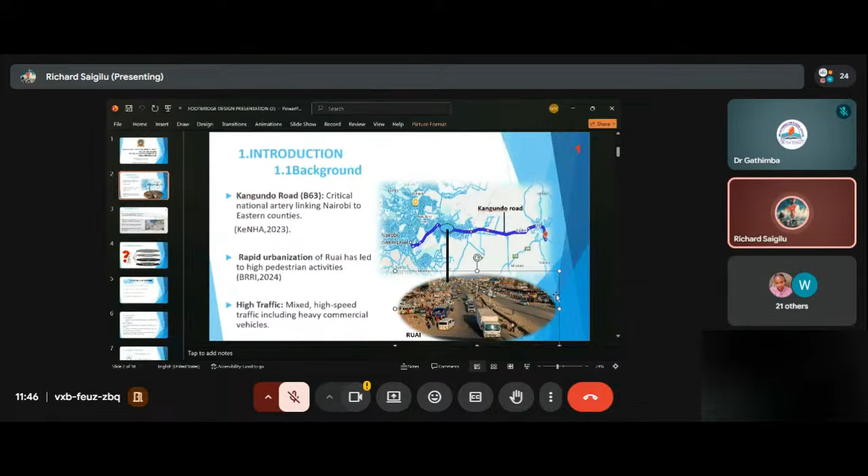Currently, there is a lack of crossing infrastructure, and our study proposes a grade-separated footbridge of 15 meters. In addition, the study explores the use of RCA as an alternative for natural aggregates. From previous studies, it has been shown that RCA can provide additional strength and durability when properly designed. Our study also considers a lattice structural design and examines the shear connection behavior of the RCA-based components, as supported by the literature mentioned.

Our problem statement. This slide outlines the key problems that motivated our study. First, the study area experiences frequent traffic accidents and in some cases fatalities. Secondly, there is increased environmental pollution resulting from vehicle emissions and demolition waste generated from construction activities. These negatively affect air quality and the surrounding environment.

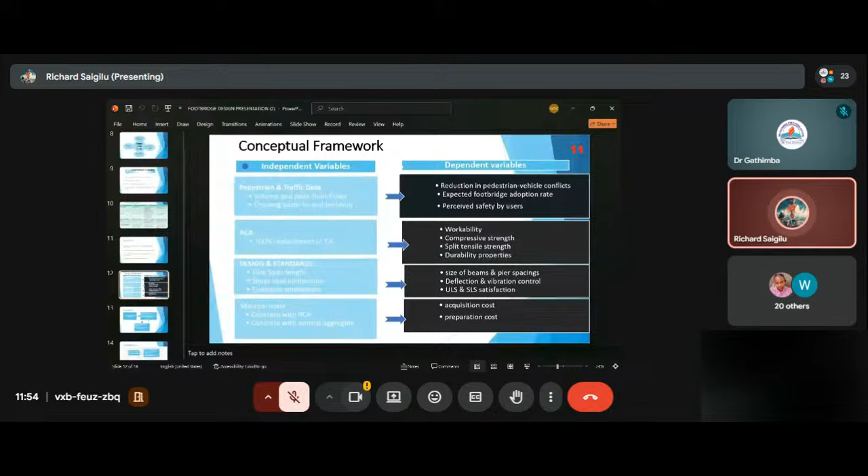In our methodology we will have two phases. The first phase will include site and data analysis. On site, we'll conduct a site reconnaissance, visiting the area to conduct pedestrian counts and observe crossing patterns. We'll also do pedestrian and traffic analysis, conducting traffic counts, speed, and composition.

Our next phase covers the second and third objectives: material and design analysis. For material suitability, we'll analyze the properties of RCA using secondary data, and assess its suitability against design requirements. We'll also do structural design, designing components such as the piers and footing, and produce the drawings. Finally, we'll do the cost-benefit analysis.

Here we'll try to compare the design which has incorporated RCA and the conventional design which has incorporated normal coarse aggregate. From there we have our project plan as listed.

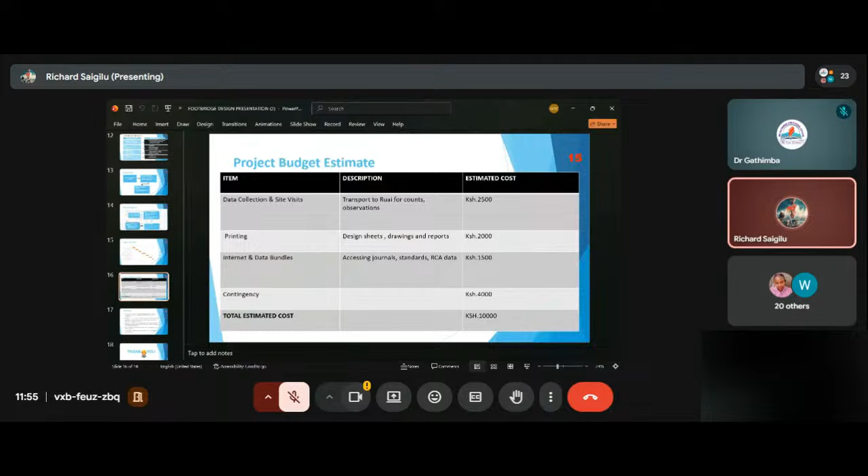Then we have our budget, which sums up to 10K. And we have our references, and finally our last slide. Thank you, and apologies for the...

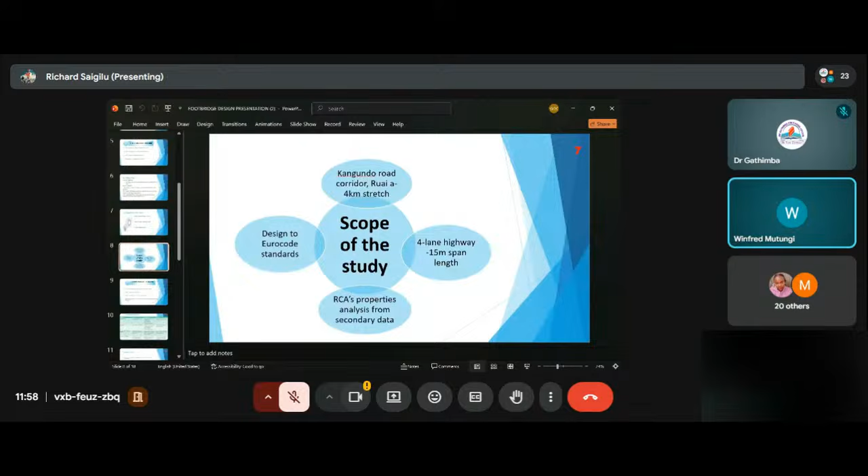Yes, you said you'll obtain secondary data for the RCA, you will not go to the lab. And on number two, you have limited traffic data collection. For the RCA, I will comment when I go to the literature review, the first one. The second one, on the limited traffic data—yes, of course you'll have limited time.

But I wanted to ask, this road is under which authority? Maybe they should have a lot of data on the traffic. KeRRA, KURA, KeNHA, I don't know—which authority is this road under? Under KeNHA. Don't they have data? Maybe you can check if you can get the data from them.

All right, so next, on the first one, on the secondary sources of data for the RCA, I hope you should have shown that in the literature review—what previous researchers have worked on RCA and what values they found. I wish you had shown that. You had shown that? Yes, you've captured it. If you have not shown, I believe you have that work in your proposal document.

But I have a question on the same. If this RCA comes from different sites—I believe you're getting it from, each RCA from a demolition site—are the properties from one site the same? Can you adopt the same in your design? Like if a building was demolished elsewhere, will the properties of the RCA be the same from two different sites? Just think about it as you adopt it in your...

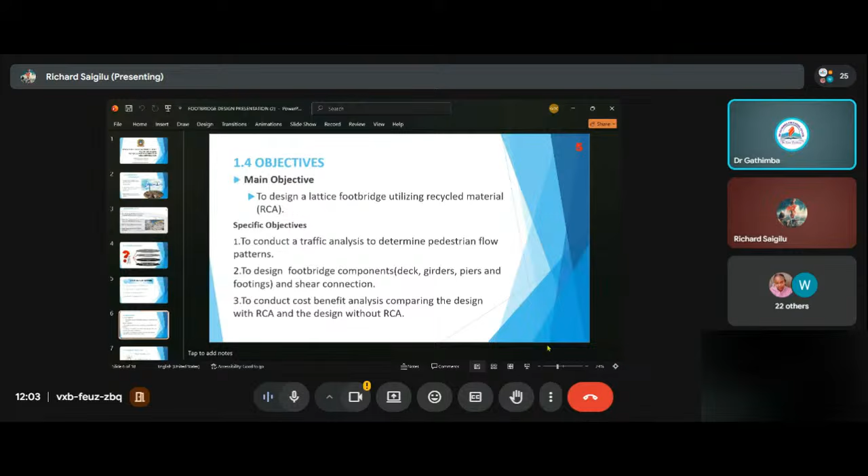Now, not that comment, your research hypothesis - you need to look at that. I think you might not have understood, from research methodology, what are hypotheses. These don't sound like hypotheses, this seems like research questions. And even if they were research questions, are they related to the objective? Because they should be directly related to the objectives.

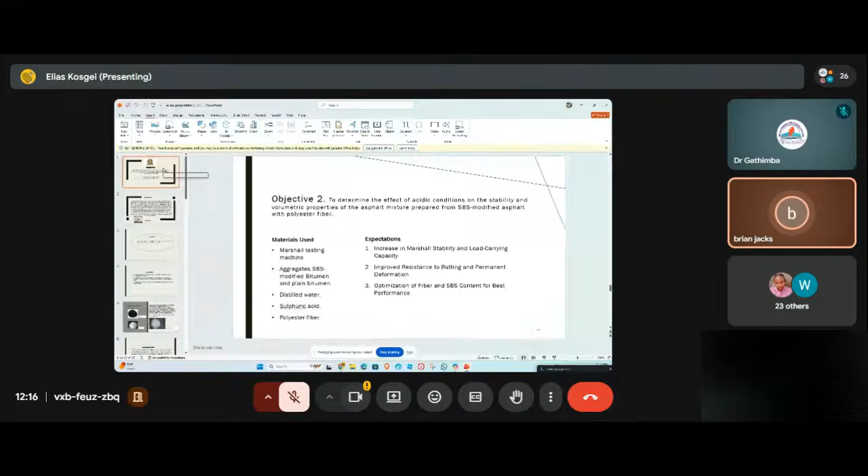Dr. Gathimba. Something for them? Thank you, Dr.

I was looking for that in the background. Your background. You mentioned about other materials that have been used before.

Noted, but in our main report, we're going to highlight that. Yeah, that's why it was a bit difficult even to get what problem and gap you are addressing.

Without that, it becomes a bit vague. You might just think you are doing work which is already existing, with no foundation or backing from past or previous studies. So that's a very crucial part.

Well, from the previous studies, they have only used the SBS polymer, not separately like us using it with the polyester fibers. So from previous background, they've only mentioned SBS alone, without including the polyester fiber. This is why our research is now unique in that way.

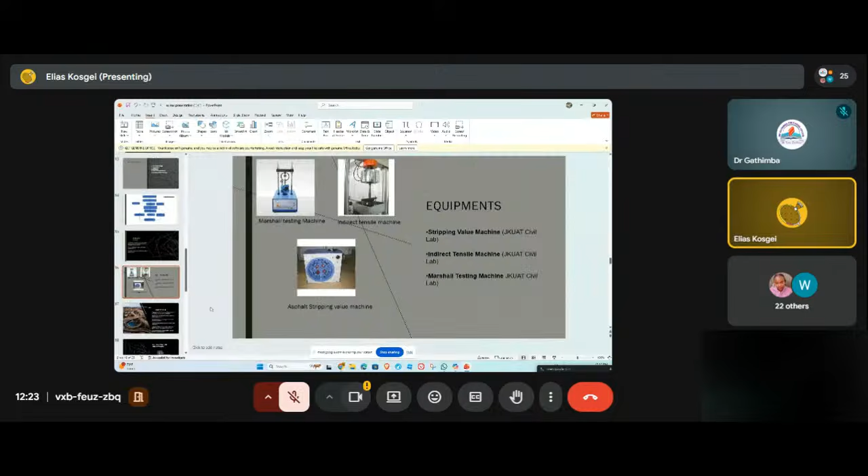Also, how we're going to the research methodology, and how we are going to plan it, and what the expectations from. So what did you change? So we added these expectations from. You added the expectations? Yeah, it wasn't there. We had only procedures - how to determine the stripping value and determine the effect of acidic conditions. So we added the expectations on what we expect at the end of this research.

Anyway, please, you should be consulting your supervisor. I'm sure you have not been seeing your supervisor. Now, general comment, your slides are very busy. Why? Until I had to stop the gentleman from reading. Under the introduction, they were very busy. Okay, go to the introduction.

Look at this, what is this? Elias, is this how we do slides? So we tried shortening the introduction part. But you mean with this one you left some things out? No, if we were to shorten the introduction part, we would have left some crucial and important information. So we tried as much as possible to.

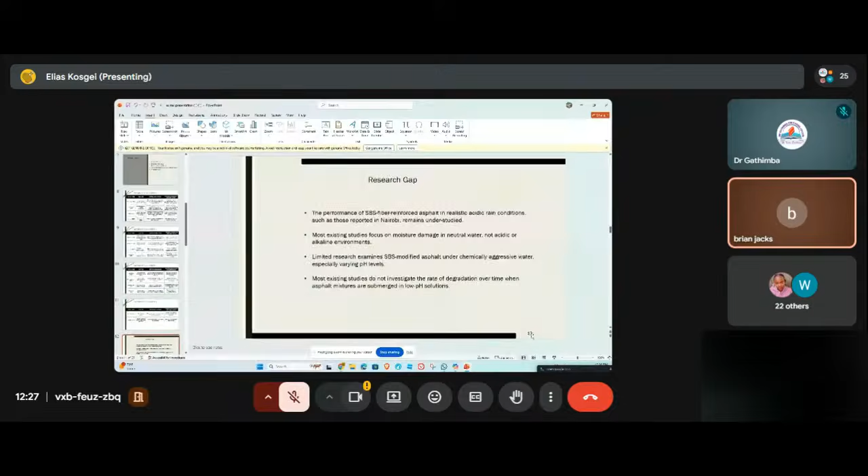Organization is poor. Again, your slides are not numbered. It is numbered here, can you see this? This is number 3. Which font is that? Font height, yeah, we'll expand it more next time. Your slides were not numbered. Some are not numbered, like number 15. They are all numbered, number 15. Let's go to slide number 15. And see they are not numbered. It is numbered actually, thank you.

Now look at this, what is this you're trying to show here? What are these lines? Slide number 15, what is this? What are these lines? This is part of the presentation, the PowerPoint slide, but the numbering of the pages is right here at the bottom. Why were you choosing this kind of presentation of the slide? What is the importance of those lines?

We'll have to improve it next time. Okay, well, there's no next time, Brian. Yes. Okay, please note that, yeah, thank you.

And your slides were not numbered, and I'm sure you need to see your supervisor more often. Okay, yes, noted, thank you, Dr. Winnie, I'm aware you are the supervisor. Maybe you may have something for them.

Okay, of course. First of all, thank you to the other panelists for the comments, and to the students. When the panelists give you comments, it's not a time to fight back. They are here to help you improve your work. So you should take these comments and use them to better improve your work. So as they commented, of course, I told you yesterday when you shared with me your slides, and I told you to improve them.

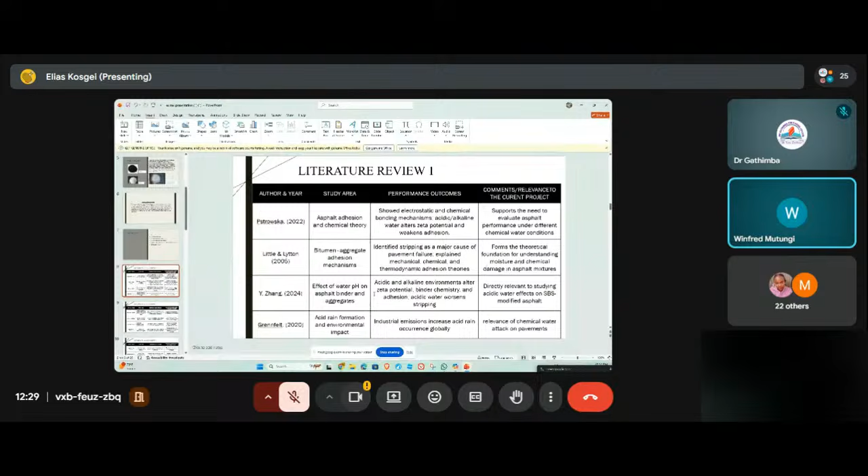Like you saw, you were here from the beginning, you saw what the other students were presenting. Their work would flow, there was flow, and they were able to be given comments. So please, if you make your work good, you give the panelists an easy time to give you guidance so that you can improve your work.

We are not here to fight with you. We are here to help you improve your work. So let's continue working together, and please, when you're trying to work on something, make sure you do that. Thank you. Thank you, Daktari. Thank you, Brian.

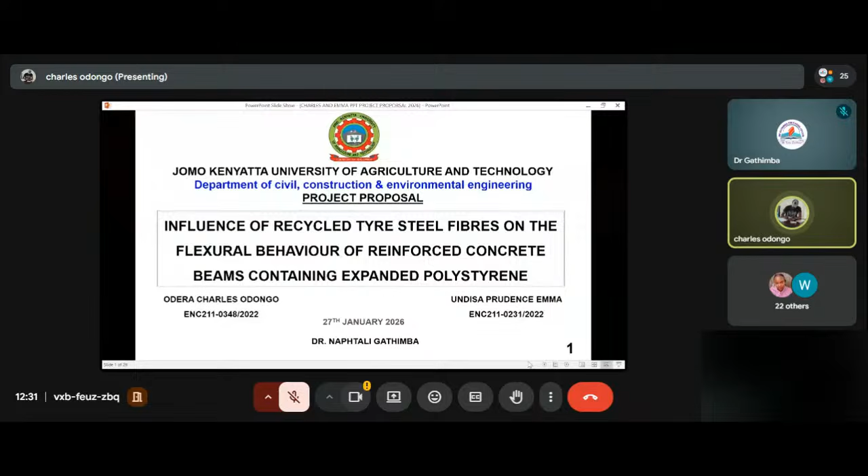On the background: due to increase in population, we need more infrastructure, which requires concrete to build, and aggregates are an important ingredient in concrete. Aggregates are extracted through quarrying, and heavy machines such as excavators use fossil fuels. So incorporating recycled materials, i.e. expanded polystyrene beads, to partially replace aggregates makes concrete production more sustainable, and in the long run it will reduce the dead load. It will also improve thermal insulation, and it will lower the cost of foundations.

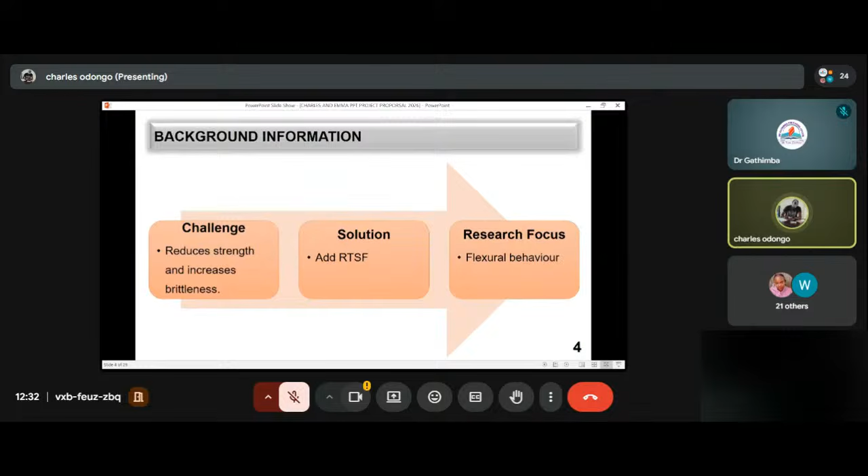EPS reduces compressive and tensile strength and increases brittleness of concrete. Steel fibers can help in enhancing tensile strength and also in crack control. We are now focusing on steel fibers from recycled tires, which will address EPS drawbacks on the reduced flexural strength behavior.

Moving to the problem statement: EPS usage has been studied in previous papers. EPS-based concrete is lightweight, but it reduces flexural strength, stiffness, and ductility, and this will limit its use in beams. Steel fibers from waste tires could enhance crack control, load capacity, and post-cracking behavior. So locally, there's limited evidence on the effectiveness in reinforced EPS beams. We lack data on how EPS inclusion and fiber dosage affects load deflection and cracks, and this gap hinders design guidance and adoption in our construction industry.

So why this study? Waste tires are an environmental nightmare. We reduce usage of virgin steel and carbon emission if we recycle them. They will counteract the strength loss to enable structural use of EPS concrete. So we are aiming for structural grade flexural strength of over 5 MPa.

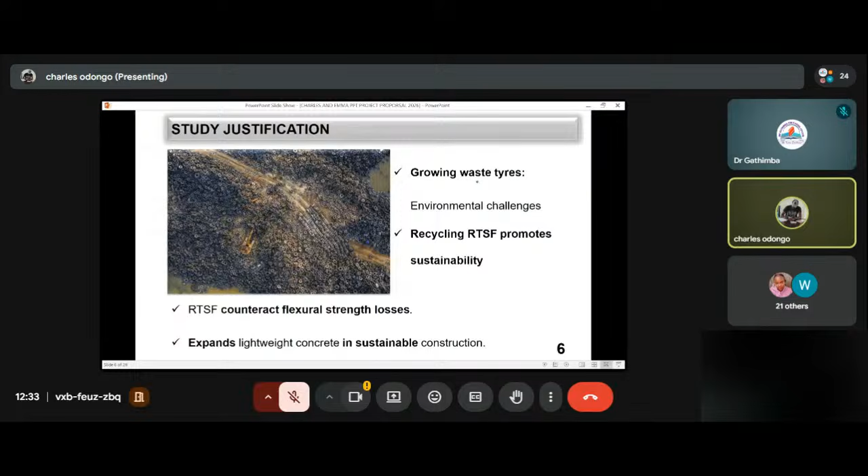Our aim is to investigate the influence of recycled tire steel fibers on the flexural behavior of reinforced concrete beams containing EPS. These are our specific objectives, which we'll discuss in the methodology.

The scope of work is experimental, focusing on recycled tire steel fibers being incorporated into EPS-based concrete. Dosage of EPS will be chosen from Salah Al-Din's work, and from this we will develop a mix design and prepare specimens for subsequent tests, such as slump test, cube test, and two-point load on beam, then data analysis, and then we'll draw conclusions.

For study limitations, field variability is not addressed because the research is lab-based. Our data analysis will be based on 28 days, so we won't focus on long-term properties such as durability. The RTSF will have irregular geometry and will be coated by contaminants. Aspects such as fire resistance will be excluded since we are focusing on flexural enhancement. High RTSF content could lead to clumping, but we will assume uniform fiber distribution.

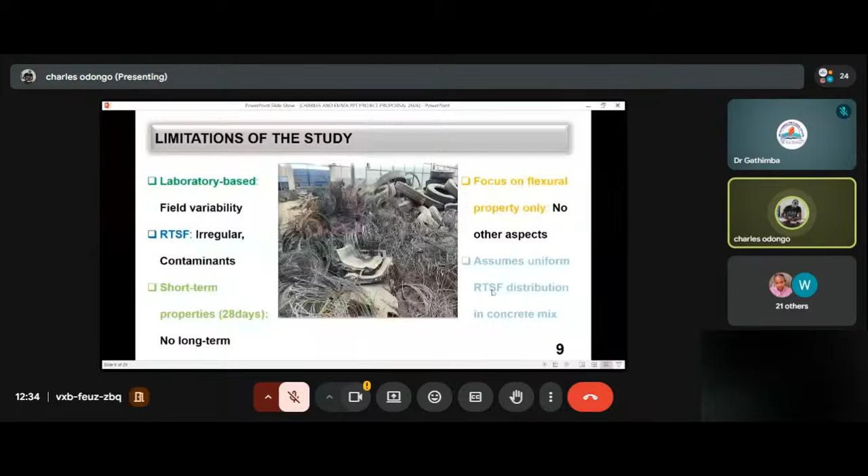On the literature review, we've looked at different research papers and picked Salah Al-Din. We are focusing on Salah Al-Din's work, so that's where we're going to get our secondary data. He was talking about the effects of adding EPS at different dosages: 20%, 40%, 60%, 80%, 100%, and the major drawback was a sharp drop in flexural strength at 40%. EPS will be constant, so he'll be our source of secondary data.

We also looked at other papers, and as you can see, most of our critiqued studies had gaps. For example, Rajeshwaran had EPS but no fibers, and this one also had EPS but no fibers. This one had no fibers but had EPS. This one had no EPS but had fibers. This one was just standard concrete without fibers or EPS. And this one incorporated new fibers, but not the recycled tire fibers that we're using.

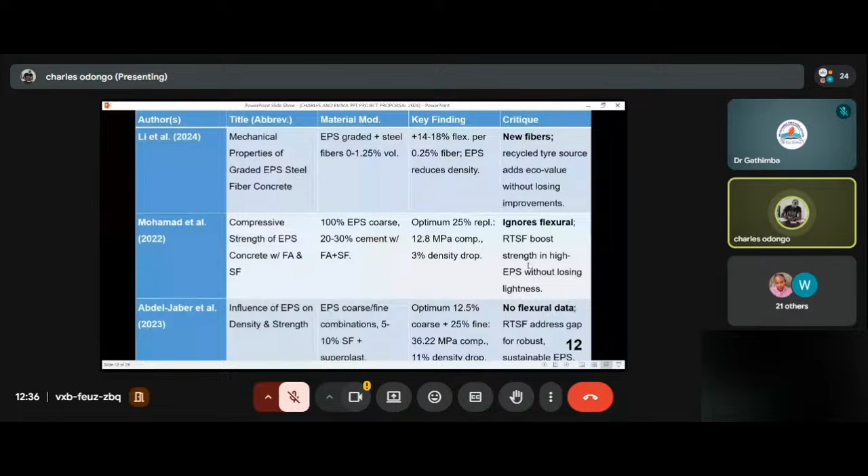As you can see, most of them ignored the loss in the flexural strength of EPS concrete. So our research gap, as you have seen, will be tackling the loss in strength and the increase in brittleness of EPS concrete. And of course, there's limited study on RTSF inclusion in EPS concrete.

Moving on, we came up with a conceptual framework where we have the independent variables and the dependent variables. We divided them into three sections. Under the materials section, we had cement, fine aggregates, EPS, and RTSF, which will affect the workability on the dependent side of the variables.

We had the things that will be varying, which are the RTSF, but for EPS it will be constant. This will affect the density, compressive strength, and the split tensile strength. On the third section is the specimen, whereby it will give us the values in dependent variables for the load deflection curves, ultimate load carrying capacity, crack patterns, etc.

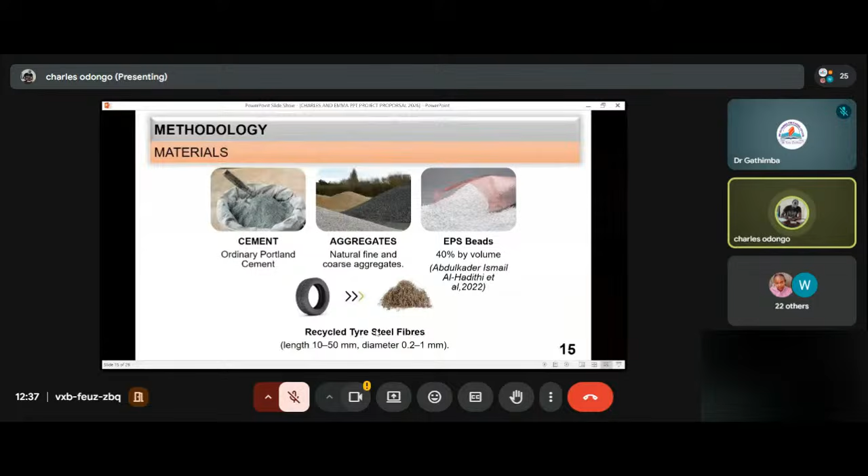Coming to the methodology, what materials will we be using? We have cement, aggregates, the EPS beads, and of course the RTSF, which is what we are bringing in. Our methodology is divided into three objectives.

Objective one is the characterization of the constituent materials. Objective two is the mix design and checking the workability and the mechanical properties. Objective three is about the beam, the fracture tests of the reinforced beam with the EPS and the RTSF.

On objective one, material characterization, we will do some tests on cement, on the aggregates and the RTSF. For instance, on the aggregates, we have to do the density, water absorption, PSD, which will give us the properties of these materials. Going to objective two, which is the mix design and fresh properties.

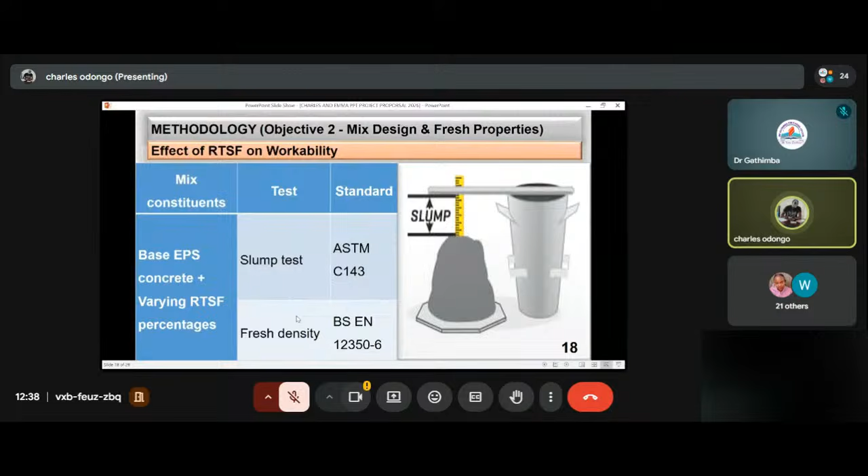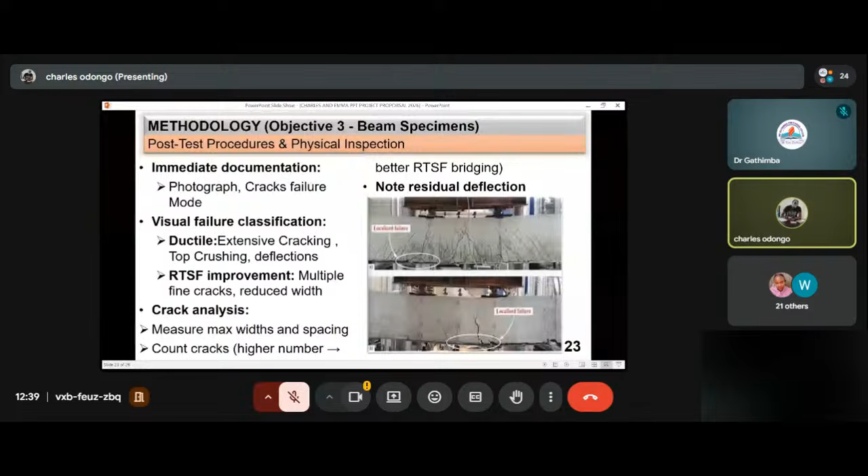So after doing the test, you take photographs so that you can assess the crack, the mode of failure, how it is happening, and measure the width and spacing of the cracks, which will add up to give us our data analysis.

From the data, we'll be able to plot a load-deflection graph, which will gauge the ductility and toughness of this RTSF concrete beam. The expected outcomes: by the end of the test, you'll be able to fully characterize the materials and know the effect of varying percentages of RTSF on the beam.

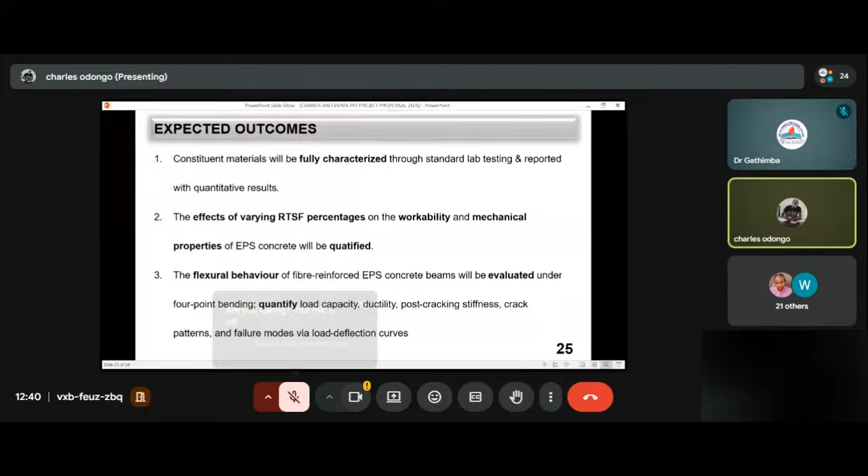Now, what were the previous comments on the last presentation or proposal, the concept? Dr. Mutungi raised issue with the specific objectives, that they were not clear.

Then Dr. Mutua told us to add visual diagrams for the beams, which is here, showing how we are going to do it.

Next, the other comment: you talked about our novelty. How have you addressed it? From whatever we've just shown you, everything is now clear. There is no storytelling or anything making things unclear for those we are presenting to.

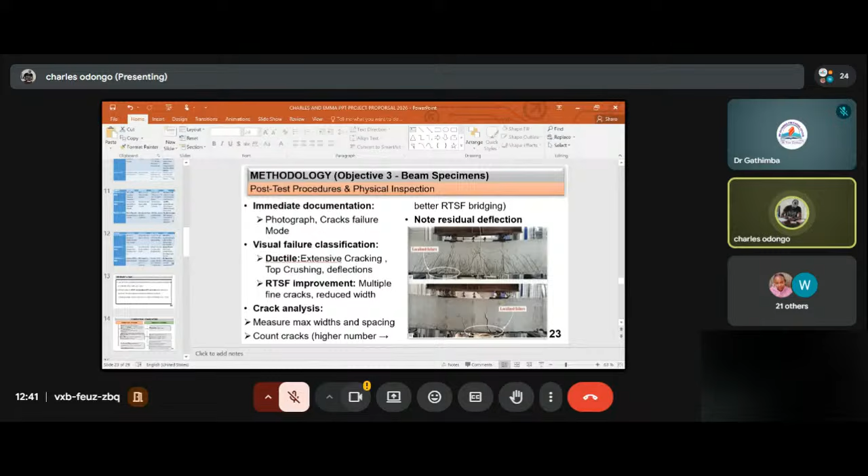So thank you. Dr. Winnie: thank you very much for the presentation. On the literature review...

I will tie this to the methodology. You said for the EPS, you will use a dosage which has already been formed by a prior study. Is that true? Yes, yes. Is one study enough to give you an amount to use in your research?

Did you find other studies, and what percentages did they give, similar percentages? Well, they had different percentages, but we picked Al-Hadithi because they had not used other admixtures or different things in their mixes.

So they were just trying to look at the EPS, how it affects concrete when incorporated to replace aggregates. So that's the only study you found using EPS alone?

Yeah, well, we have different authors, but we picked Abdulkader Ismail Al-Hadithi because we don't want our EPS percentage to change, we are not varying that one. I'm not confused that you found that study, I'm just asking.

I didn't see how much dosage, since you are adopting for the EPS. I also didn't see the percentages you suggested for the tire fibers. They will vary. Yes, those percentages, you need to indicate them to show us how much you'll be varying them. Okay, thank you.

Thank you. Uh-huh. Dr. Gathimba.

Okay. Yeah. Yes. Okay.

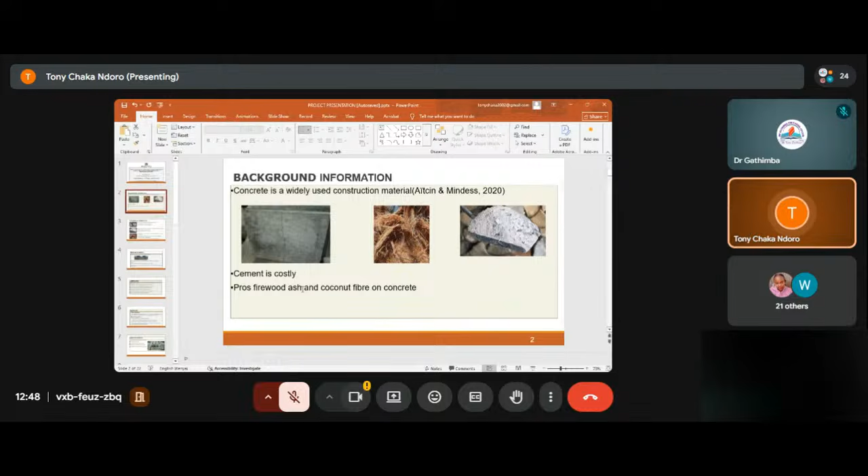Background information: early cement hydration produces calcium silicate hydrate and excess calcium hydroxide, while the firewood ash reacts pozzolanically with the calcium hydroxide to form calcium silicate hydrate and calcium aluminate hydrate, thereby improving strength and durability. But this reaction will not remove the calcium hydroxide completely — it will be left in little amounts, which will interact with the treated coconut fiber, leading to enhancement of fiber-matrix bonding at mid alkalinity, increased surface roughness, and also preserved fiber strength and crack bridging ability.

Problem statement: the concrete cracks under flexural loading, and the treated coconut fiber will deteriorate over time due to the excess calcium hydroxide. The firewood ash alone does not consume all the calcium hydroxide, and the separate use of the two will fail to balance the benefits of the long-term material performance of the concrete.

Justification: the high cost of cement, the availability of natural and biomass waste — in this case coconut fiber and firewood ash. The treated coconut fiber will degrade due to excess calcium hydroxide. The firewood ash does not remove all the calcium hydroxide, and combining the two will help control the calcium hydroxide level.

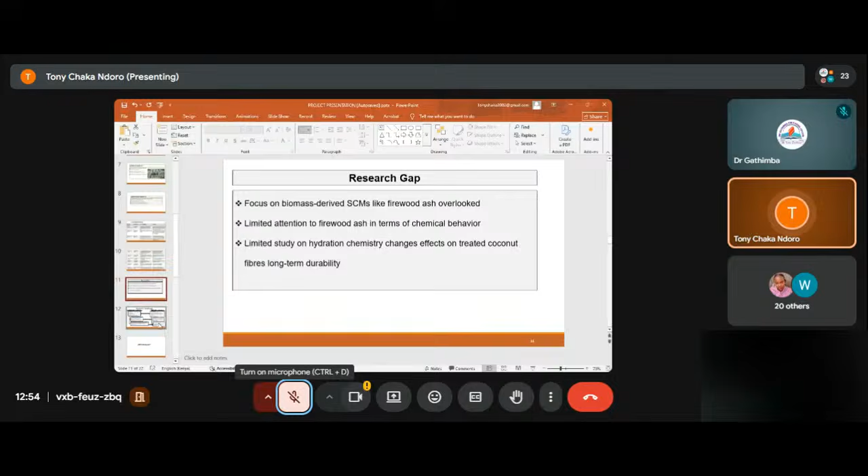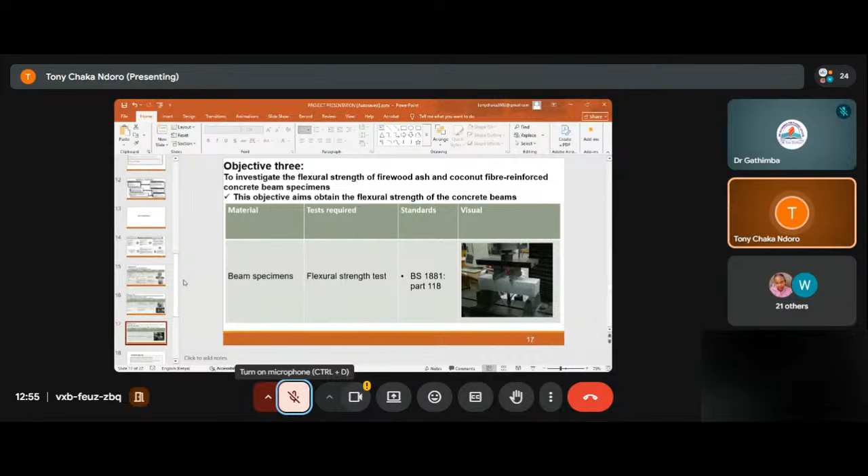These are the objectives: fine aggregates and coarse sieve analysis, firewood ash and treated coconut fineness for the firewood ash, the ones that will pass through the 75 micrometer sieve, coconut fibers, water absorption tests for workability, cement consistency and setting time, concrete slump test and concrete mix design for the cubes (compressive strength), and for the cylinders, the split tensile test, beam specimen, flexural strength test.

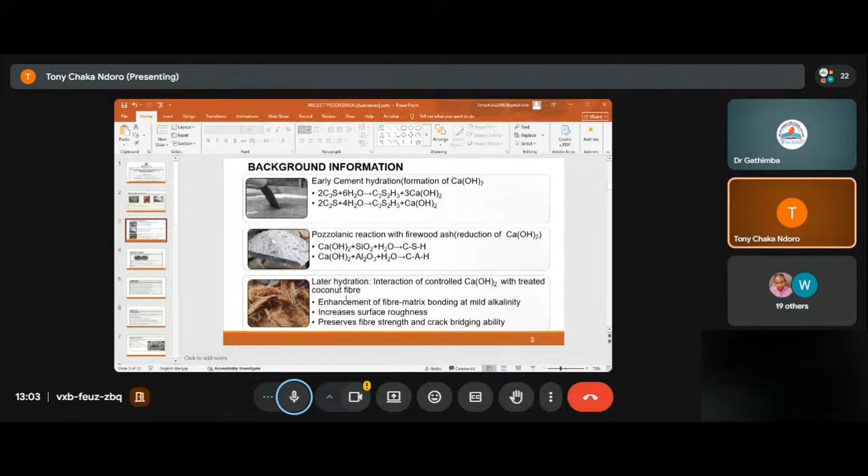No, we are not using calcium hydroxide to treat the fibers. We are using fresh water to treat the fibers. We had indicated this - just a minute. Yes, here we are going to soak it in fresh water to treat the fibers.

Yes, but no, we are soaking them in... yes, pardon, yes.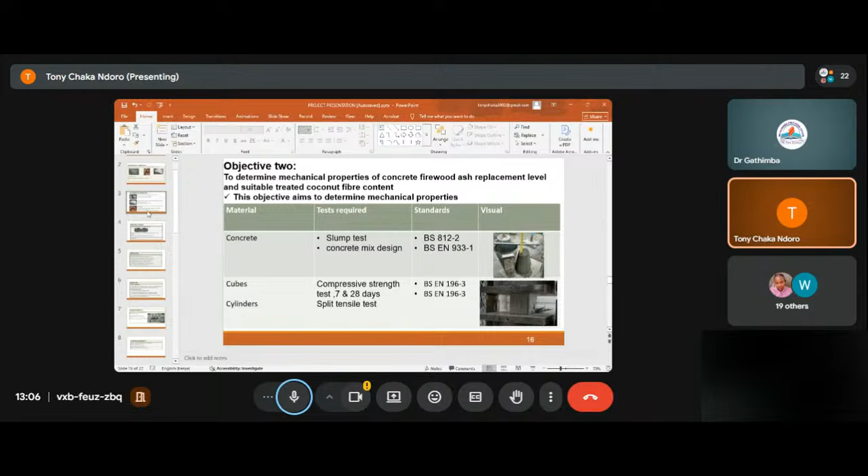The second objective. Okay. Mechanical properties of the concrete.

Noted, sir. Yes. Noted, sir.

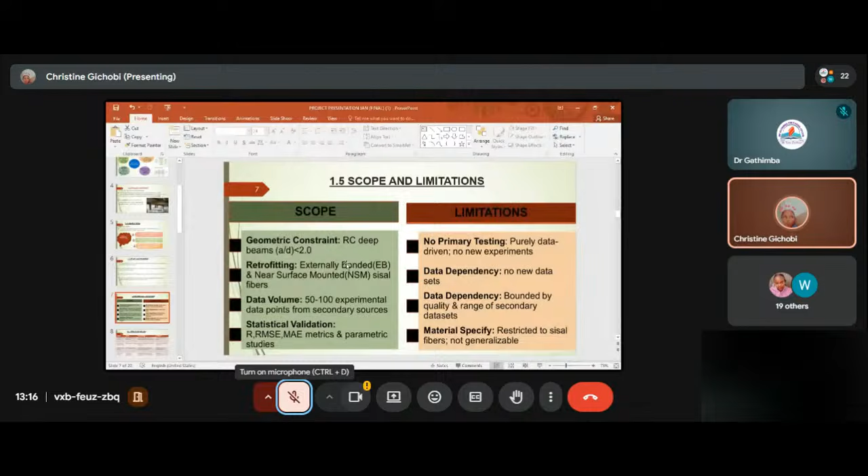The limitations are: because this is a data-driven study, our model is limited by the quality and availability of secondary data. Additionally, while we are modeling flexural performance, the environmental durability of sisal fibers over long periods is outside the current scope of this predictive model.

More advanced tools like ANN offer high accuracy, but the limitation is that they lack transparency and do not provide an easy-to-use equation for designers. According to the author Shah, GEP is powerful because it produces interpretable equations that outperform traditional regression, yet it has rarely been applied to natural fibers or deep beams.

In summary, we have information on sisal and information on deep beams, but the two have not been effectively combined in a predictive framework. As for the research gap, there is currently no existing predictive model designed to estimate the flexural capacity of RC deep beams specifically strengthened with sisal fibers.

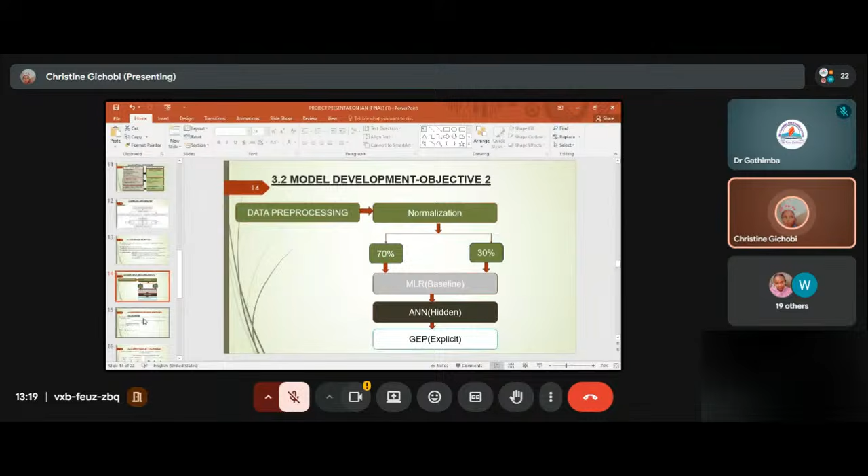To the next phase, based on objective 3, which was comparison of the models. To do this, we need to validate all of the models. First, we'll run a statistical evaluation using metrics such as R-squared and RMSE to mathematically prove which error rates are low. Then we'll verify visually using scatter plots. We want to see the model where the predicted points line up perfectly on the diagonal with experimental data.

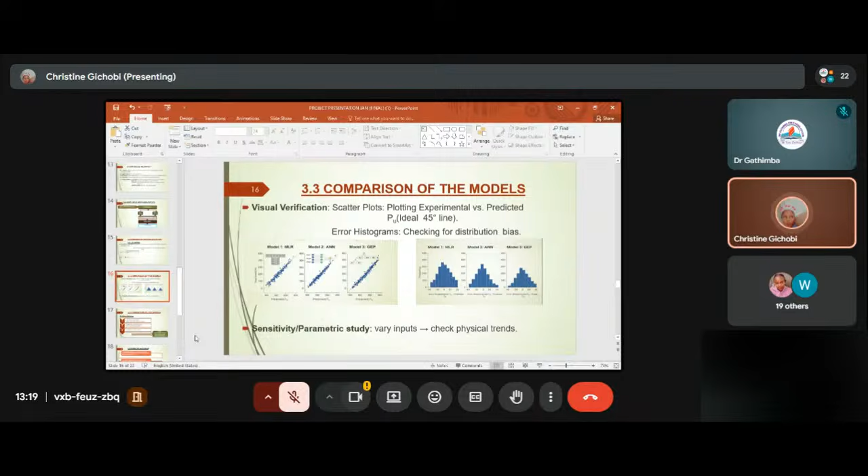Then we conduct a parametric study. We test the equation to ensure it obeys laws of physics. Then, to accept the model, we'll follow this criteria, and the model which is physically consistent and accurate will be adopted.

To the expected outcomes, to conclude our study, we anticipate 3 deliverables. First is the data — we will analyze data from different data sources. Second, we'll generate a practical design equation that engineers can actually use. Third, we expect to demonstrate superior accuracy, proving the GEP model outperforms other models.

Now, what were the previous comments and how did you handle them? We were told to change our topic to focus more on the analytical side rather than the experimental side, and we were told to make our topic more investigative. That's why we are not assessing.

Next comment: we were told also to focus on one natural fiber, which we chose — sisal. Why? Because it is locally available and has high tensile strength. Locally? Locally is where? In Kenya. So Kenya is local. Okay.

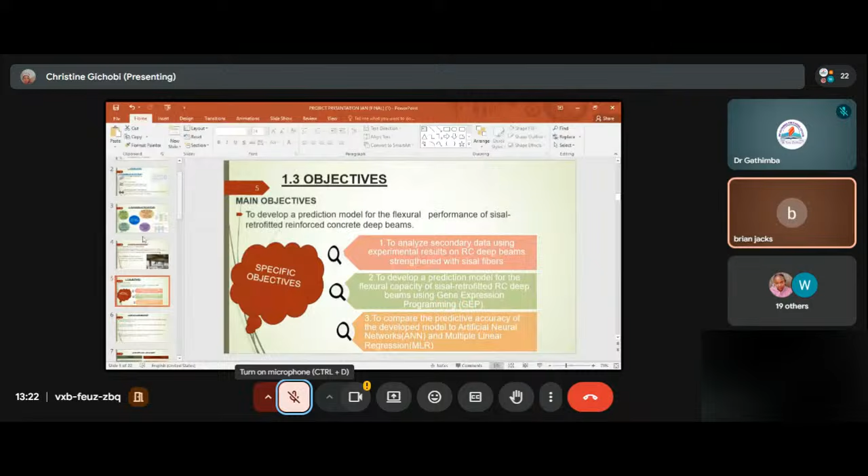Any other comment which was there before? We were told to add more graphics and make our slides less busy. Okay, you have tried on that. Yes. Were there any other comments? Or was that it? That was it. Asante.

Dr. Winnie: Okay, thank you for the presentation. On the first slide, on the topic — I wonder whether the last part, on using secondary data, is important. Just think about it, that last part on using secondary data. Okay. Then I have a question on literature, but you can answer through the methodology on objective one.

Yeah, the methodology on objective one. Yes, data mining. Yes, to help you get the values for using the model. Is that true? Yes. Have you already researched this literature in your literature review? For this objective, because you'll use previous experimental data, then now you go to the prediction — have you already done that?

We have not done that yet. I hope that would have formed also some part of your literature review. Okay, that is my comment. I had hoped you had done that so you could highlight a few things, but I believe you'll do this because it is part of your methodology. Yes, we'll do it next semester. Not next semester — you don't have much time. Anyway, all the best.

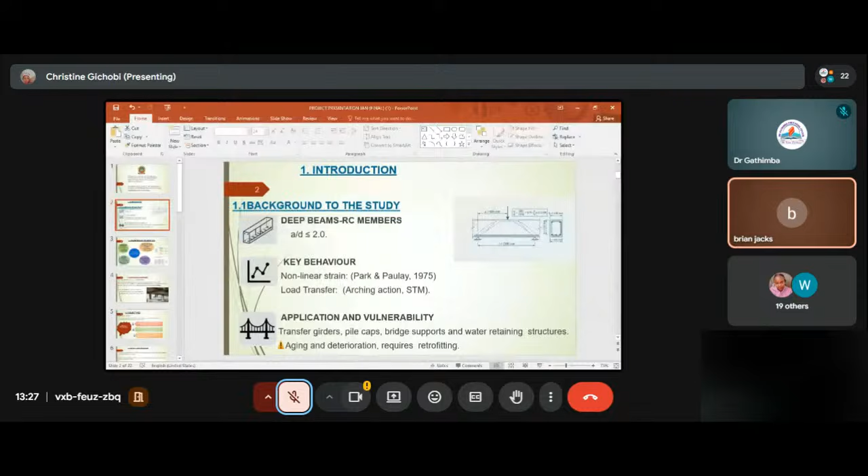Yes. Okay, yes. Thank you, mute your mic. Then mute your mic, stop sharing. Asante sana, next group. That was who? Nicole.

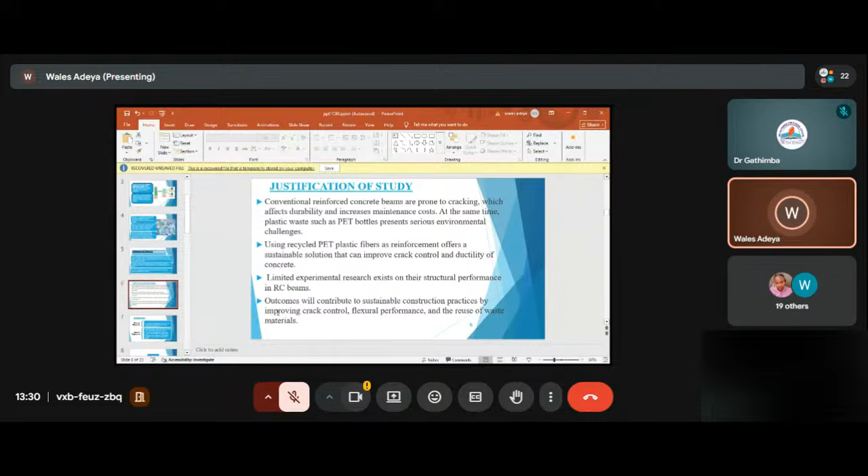The outcomes will also contribute to sustainable construction practices by improving crack control, flexural performance, and the reuse of waste materials.

On the objectives, the general objective was to evaluate the performance of recycled PET plastic fiber reinforced concrete under compression and flexure.

The specific objectives were: first, to determine the flexural strength of recycled plastic fiber reinforced concrete; second, to determine the compressive strength of concrete with PET fiber as reinforcement; and third, to compare the performance of PET fiber reinforced beams with that of conventional RC beams.

The scope of the study will include laboratory testing of RC beams under static flexural loading, focus on compressive and flexural strength tests using standard cube tests, and also the durability and long-term environmental effects.

On the limitations of the study, there's a limited number of beam specimens due to time and cost constraints, the results may not fully represent long-term field performance, and there's also variability in recycled PET fiber properties.

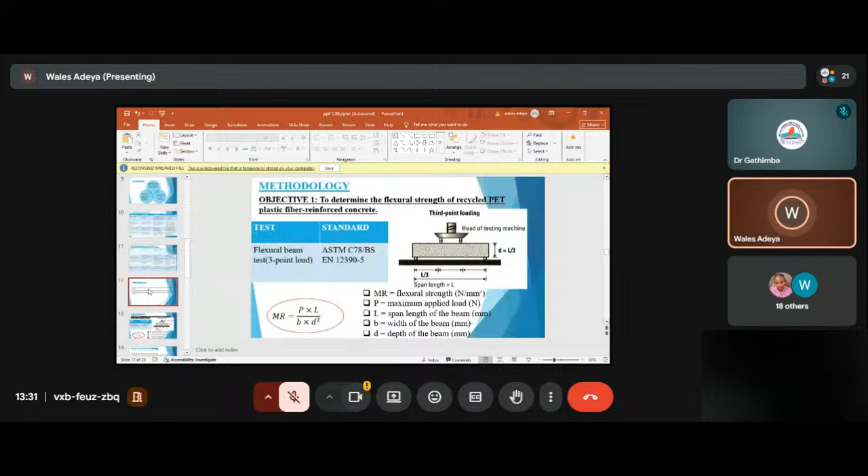On the research gap, from the literature review we found there's limited studies on reinforced concrete beams using recycled PET fibers, insufficient data on optimal fiber dosage for structural applications including the amount of fiber to be used in RC beams, and a need for comparison between fiber reinforced and conventional reinforced beams.

On the methodology, from the first objective, to determine the flexural strength of recycled PET, we were to conduct 3-point load tests, and these are the formulas to do so.

On the second objective, to determine the compressive strength of the PET fibers as reinforcement, we were to do sieve analysis, slump test, and the compressive strength test, along with the formula. Then for that objective, we have to compare the results of the PET fiber reinforced beam with the conventional RC beams.

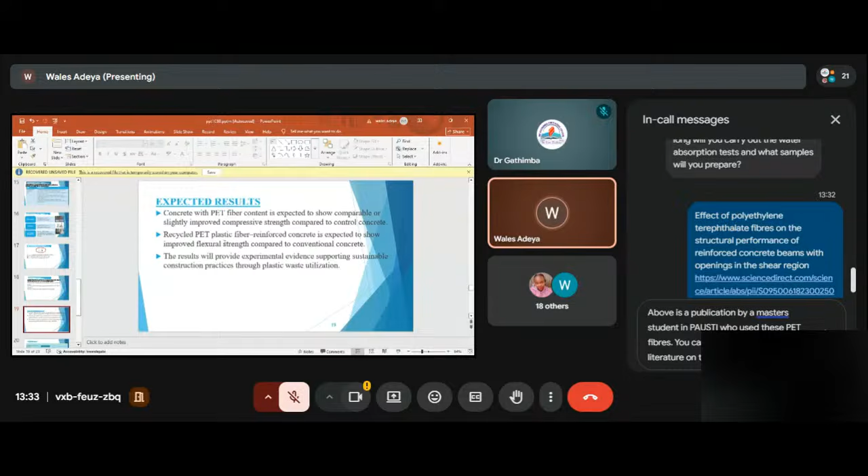The expected results from the first objective were that the PET fiber reinforced concrete were to show comparable or slightly improved compressive strength. On the second objective, the fiber reinforced concrete is expected to show improved flexural strength, and the overall result will show that it can be possible to use PET in construction.

We have a work plan and the budget, references, and thank you. Thank you.

Thank you. Now, I've been indicated as a supervisor. I want to ask you, what were the previous comments from the last presentation we had? The last presentation, we had to change the title completely because the other one was on 3D, which was said it was not easily achievable. So we changed the topic to using recycled PET fibers in concrete. Let's go to the topic.

So you changed to this topic. Yeah, we changed to this topic. Why? We changed to this topic because we wanted to use the recycled PET fibers as reinforcement in reinforced concrete beams. Why the PET plastic fibers? Yes, the PET plastic fibers can be used in beams because they are available from the PET plastic bottles, and also they are not prone to cracking, and they offer high tension stress.

So I don't know. Dr. Gathimba, could you just come in at this point? No. No.

And openings. Okay. Daktari, you are muted. No, just now. Okay. Okay. Okay. Okay. Thank you.

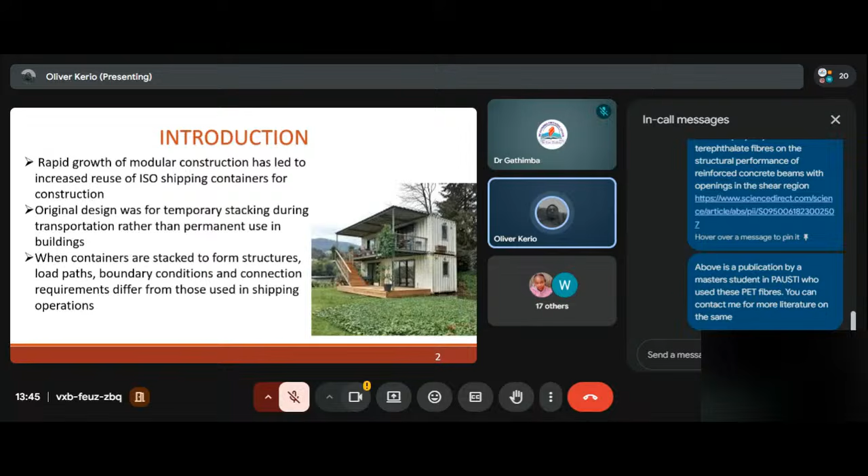When containers are stacked to form structures, load paths differ from those used for transportation. The joints for container structures are subjected to dead loads, live loads, and horizontal loads from wind and seismic action. Depending on the connection method, joints may behave as rigid or semi-rigid. Studies focusing mainly on container joints are limited, and our study will focus on the structural behavior of container joints.

For a problem statement, the current research on container construction focuses on the strength of individual shipping containers, while joints receive comparatively little attention. The design for shipping containers is for cargo transportation, and when repurposed for construction, the joints are subjected to different loading.

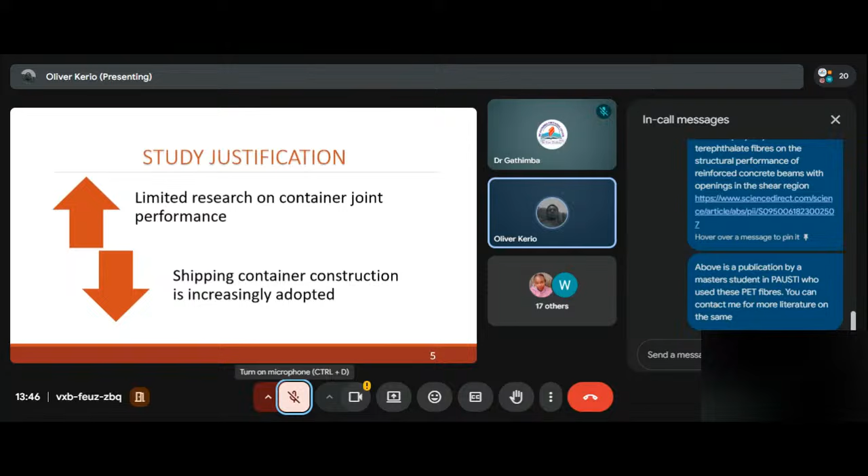For study justification, there's limited research on joint behavior, since most studies focus on the container as a whole. Also, the increased demand for rapid, cost-effective, sustainable construction solutions has led to widespread adoption of shipping containers as modular building units.

The scope of our study is the structural behavior of container joints in multi-storey shipping containers, with emphasis on load transfer mechanisms, stiffness characteristics, and stability performance. The limitations for this study are that the long-term performance of joints are not considered, and the study does not include experimental testing. It focuses mainly on software.

Our main objective is to carry out a detailed study on the behavior of container-to-container joints in multi-storey shipping containers using software. The specific objectives are to analyze and compare different types of container connections, to evaluate the effect of container joint design and bracing systems on horizontal stiffness and slenderness, and to determine the maximum safe stacking height of shipping containers for residential construction.

For our literature review, we read on modular steel construction systems, and realized the study focuses on general modular systems and not container joint behavior. We also read on structural performance of container buildings, and realized the study does not investigate joint behavior under lateral loads. We also looked at container-to-container joint connections, and realized there was no comparison of different joint types.

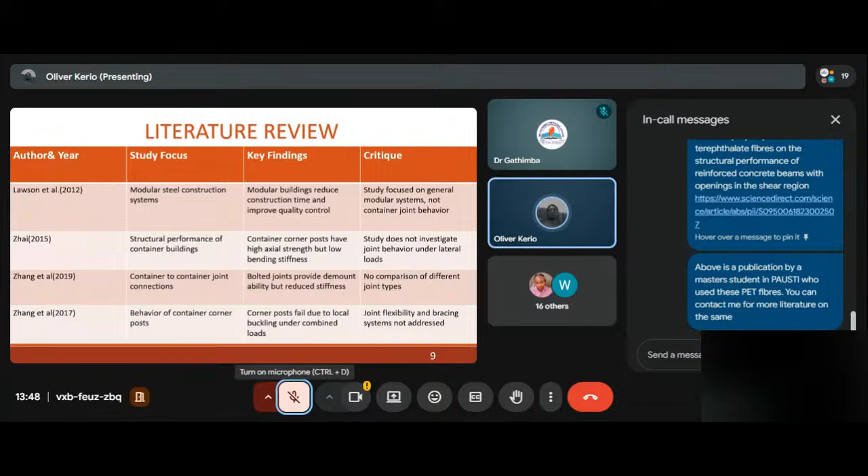We also looked into connection behavior under cyclic loading, and realized the study has not investigated container joints. We also looked into modular systems suitable for low-cost housing, and realized container joint analysis was not studied.

Methodology: for us to achieve our first specific objective, which was to analyze and compare different types of container connections, we are first going to model our container structure, multi-story up to about 5 floors. We are going to do different types of connections, rigid connection and semi-rigid connection.

Here is a step-by-step on how we're going to do it on ETABS, how we're going to do the analysis. We are going to create the joint link element, assign the rotational stiffness, and insert the link at the joint location where we have modeled. Then we're going to apply loads.

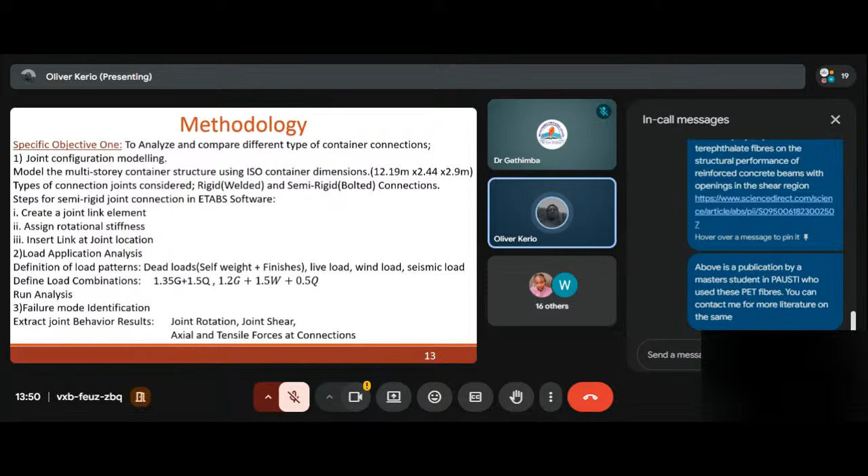Now for us to achieve specific objective number 2, which was the effect of joint design and bracings on horizontal stiffness and slenderness, apart from the joints, we're also going to add bracings onto the model. The types of bracings we're going to add are the X bracing, the chevron, which is the V or inverted bracing, and the K bracing.

The procedure for modeling is that we're going to insert a new frame element for the bracings, and we're also going to carry out the analysis.

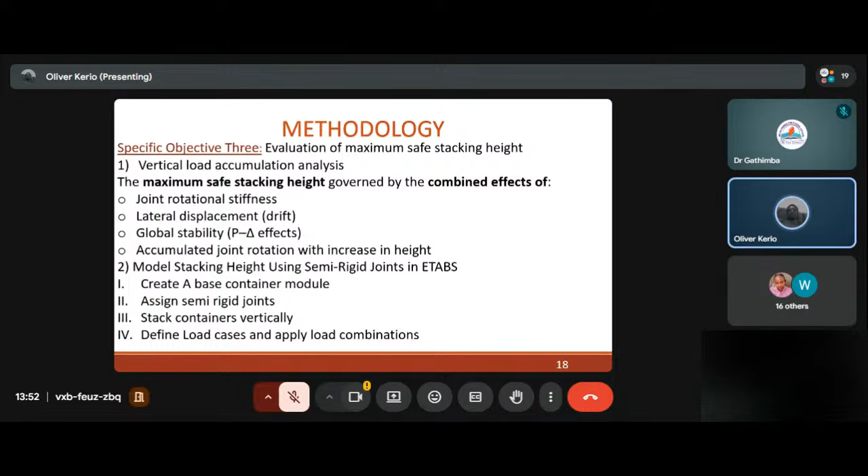So the model for stacking height that we're going to use in ETABS: we're going to create a base container module, and then we're going to assign the semi-rigid joints into our module.

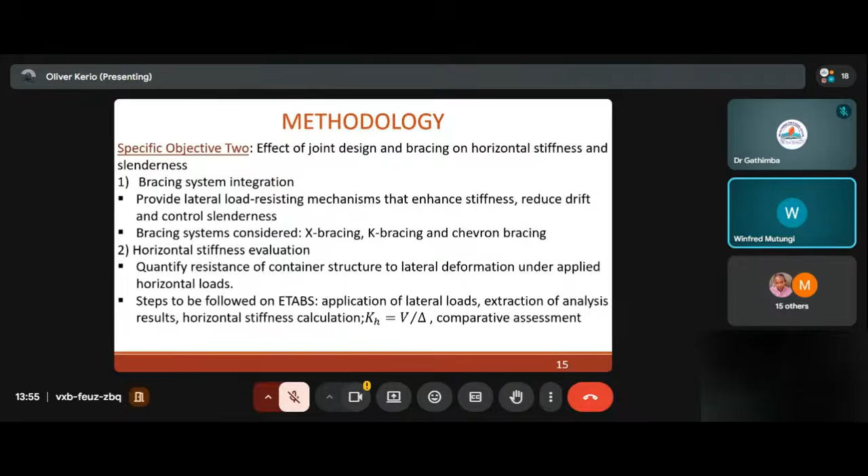So I just wish you keep to your plan, as you said. But on your time plan, can I just comment? Sorry, I thought you had 4 weeks, but it's 3 months. It's okay. I wish you all the best. Thank you. Thank you.

Any other questions? Okay. Dr. Gathimba, please come. Right. Thank you. And thank you for that presentation.

Yes. Pardon? What is the difference? The second statement: containers are designed for vertical stacking, not for building loads. The original design for containers was for cargo transportation, and not for building purposes.

Yeah, but I'm talking of the loads, because the containers contain goods which have got some weight, right? Yes. And you're also going to consider some dead loads and some variable action, right?

So that statement to me is not very clear until you clarify it. Either way, whether it's as a container or it's as a building, it's still having some gravity loads and dead loads and live load and so on and so forth. So you may need to clarify further as you do in a subsequent presentation.

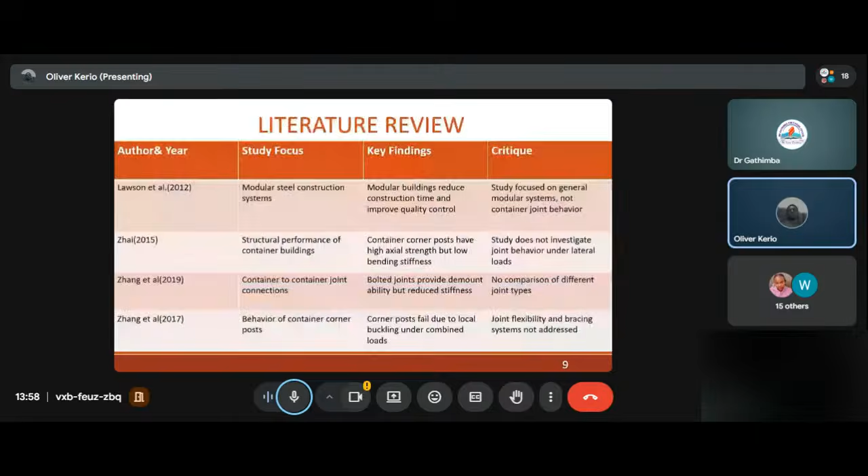We were determining which type of container structures. No, I'm saying we are talking about the connection. Which type of joint is more effective in container construction—how will you measure the effectiveness? There must be a measure, a quantity that will tell you this is more effective.

That was under methodology. When you hear the word specific objectives, the specific parameters, you must have a quantifiable, measurable parameter. Otherwise it's not smart—quantifiable, or measurable. There's something you are measuring.

In assessing, the title you are saying is assessing what? Analyzing, and you are telling me to determine which one is more effective. In determining what is more effective, there are parameters you are quantifying, and you are saying this is higher than this, this quantity is lower than this.

Yes, that's what differentiates specific objectives from the main objective. The main objective can be general—you don't have to specify the parameters. Okay, yes, so please check that.

Then your research gap—the word 'limited' is a sellout. You can't say limited. The moment you say limited it means there is a study already existing. It might mean there are two studies. But what if it's just one study, which is exactly what you are doing? Would you still conduct a study and say only one person has done that work, so I am repeating?

No. Even if only one person has done that study, read that work, identify the gap from that work. Identify the gray areas that need clarification from what they have already done. So this research gap, please check—not limited.

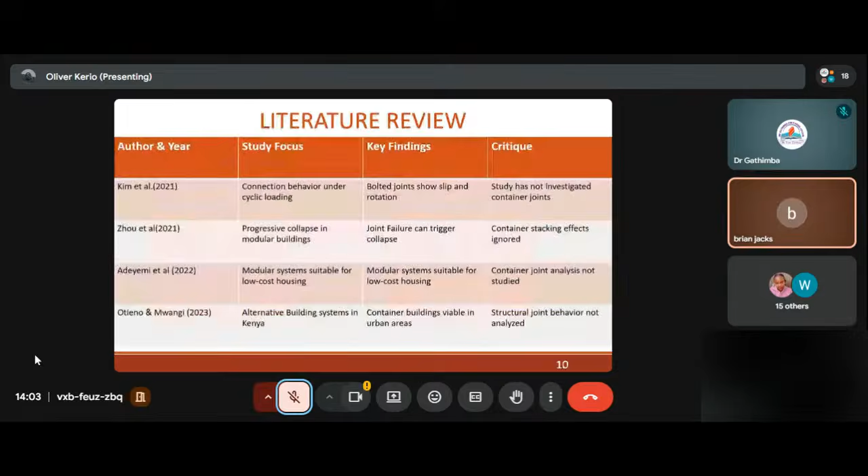Who is coming next? We are coming next. Okay.

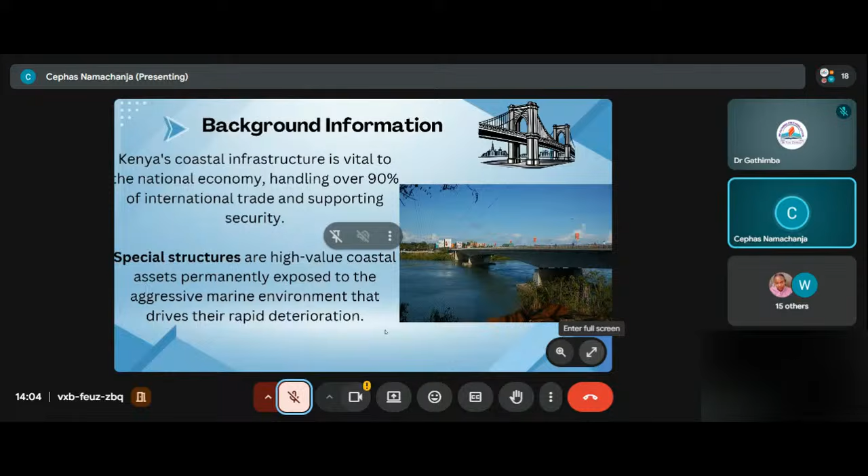The coastline of Kenya houses critical infrastructure that facilitates over 90% of the country's international trade. Special structures such as dams, piers, bridges, quay walls, and water tanks are exposed to a harsh, aggressive environment such as alternate cycles of wetting and drying, tidal action, and our focus, chloride action, which mainly leads to deterioration of these structures from the formation of microcracks.

The microcracks act as direct pathways for chloride and other deteriorating substances that penetrate the concrete cover, reach the steel reinforcement, and corrode it. Existing strategies such as improving the mix or using surface protections are protective measures, but they don't autonomously repair the damage.

Our proposed method is self-healing using sodium silicate. It will involve saturating silica gel granules as our carrier with sodium silicate and placing them in the concrete. The reaction between sodium silicate and calcium hydroxide will yield calcium silicate hydrate gel, which will act as the sealant for our cracks.

So for our problem statement, microcracks act as direct pathways for chloride ingress. Chloride corrodes steel reinforcement. Corrosion causes spalling, widens the cracks, and eventually compromises the integrity of our structure.

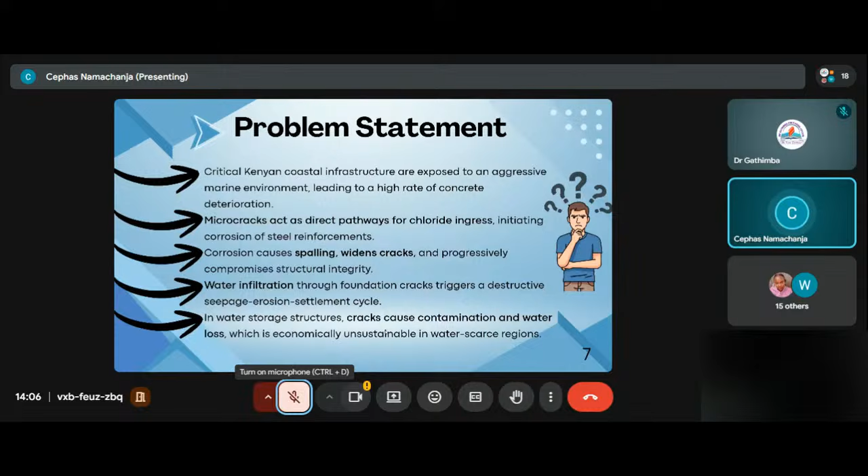Some of the problems faced are water infiltration through foundation cracks, which leads to erosion, seepage of contaminated soil water, and settlement problems as there is loss of soil support. In water structures, this results in water loss and contamination of water quality.

For study justification, there is little data that exists for the application of sodium silicate using silica granules, specifically in the Kenyan context. The proposed system is intended to address the initial stages of deterioration by addressing the microcracks the moment they form, as opposed to emergency fixes where a visible form of deterioration must be seen. It also offers major cost savings by extending the structure's life, and it outperforms some of the current solutions.

For example, epoxy injection is costly, temporary, and it requires damage to the fabric. UV exposure also degrades surface coatings over time, which will require reapplication every 5 to 10 years.

For our objectives, our main objective is to determine the performance of the autonomous self-healing technique and the basic material properties of the concrete mixes used in special structures, as a basis for evaluating chloride ion ingress.

For specific objectives, we are going to determine the basic and mechanical properties of the materials for use as a baseline on the study of self-healing concrete using sodium silicate, determine the formation and development of microcracks under controlled loading and chloride conditions, determine the durability and effectiveness of sodium silicate in management of microcracks and chloride penetration in concrete, and determine and analyze a mathematical equation for the relationship between crack width, healing time, and percentage of strength change.

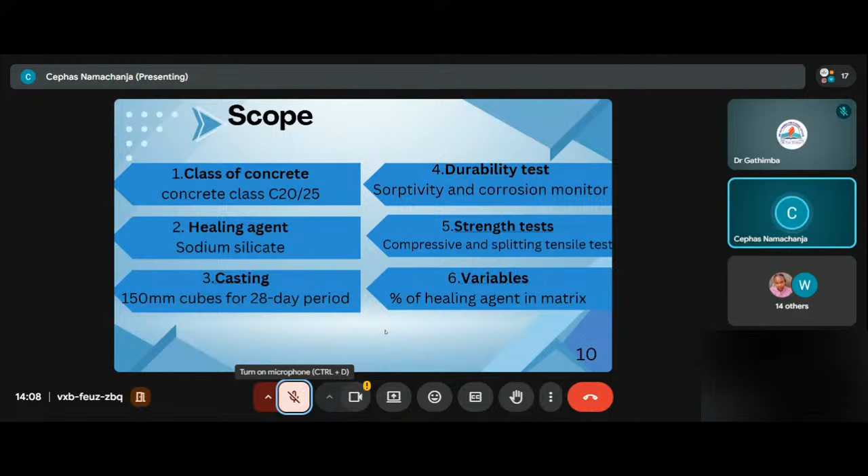We'll also perform mechanical and durability tests. We will simulate a chloride condition environment where we will expose our pre-cracked molds through a repeated cycle of partial immersion in 3.5% salt water, followed by air drying periods. The entire testing procedure will span a period of about 6 weeks.

For our limitations, we have the limitation of project budget, which is limited. It will affect the number of molds that we can cast. We are unable to use expensive specialized materials such as biological healing agents, and we don't have access to high-cost analytical equipment.

For our time period, we'll base our healing performance on a 40-day post-healing period. We will also have issues with durability because we can't span our study for long periods of time.

For our literature review, the first study area was encapsulation in porous carriers. We found out that they used expanded perlite as their carrier, which affected the compressive strength of the concrete when it was inside the concrete matrix. As a change, we are going to use a different carrier, which is silica gel granules.

For the second one, which was bio-based material for marine environments, their study evaluated healing mainly through observing crack closure and permeability. For us, we're going to evaluate the healing through strength recovered. And then the third one was a review of microbial self-healing.

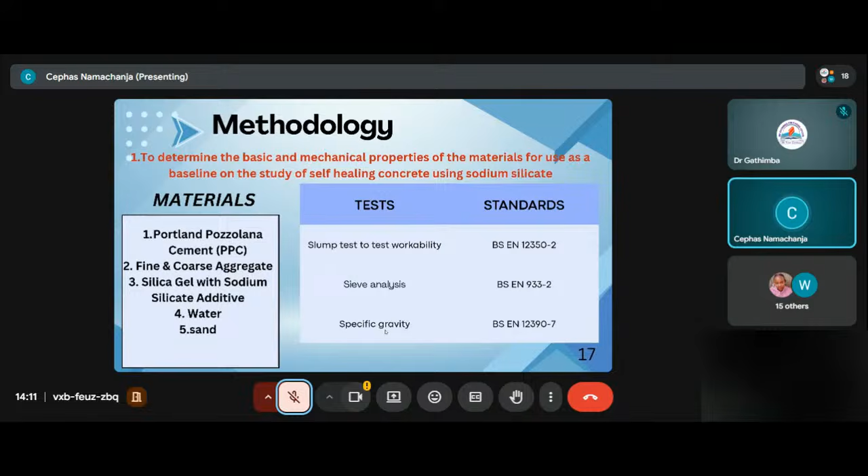Methodology: based on our first objective, we're going to conduct slump tests to test the workability of the materials, sieve analysis, and specific gravity according to the standards. This is the total test we perform.

Based on our second objective, we're going to conduct a splitting tensile test to induce the crack. Based on our third objective, for durability, we're going to conduct corrosion monitoring, a conductivity test, and compression strength test.

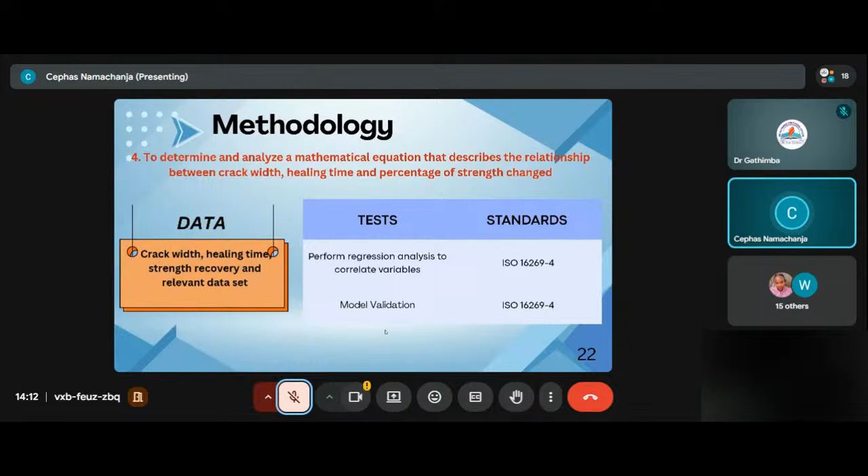These are showing examples. Our fourth objective was based on a mathematical model relating crack width, healing time, and percentage change. We're going to perform a regression analysis and validate our model.

sand, and cement that are going to be used in the study of our self-healing. We're going to look at the formation and development of microcracks under controlled loading and chloride conditions.

We're going to determine the durability and effectiveness of sodium silicate self-healing techniques in managing chloride penetration. Lastly, we are going to have the relationship equation between crack width, healing time, and percentage of strength recovered.

Thank you. Now, what were the previous comments? Previously, we were told to work on our title.

We were told to include the healing agent that we're going to use, which is sodium silicate, and as well, we were told to reduce the number of words, which we reduced to be less than 18.

Secondly, we were told to work on our objectives, to arrange them in the order in which we're going to perform them in the lab, and as well, our first objective should be based on the material. Also, we were told to make our presentation less wordy. So that's all the changes we were told to make.

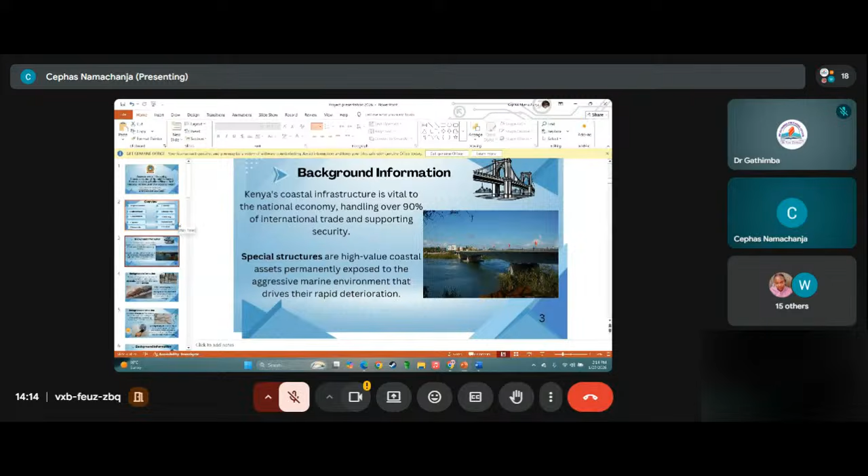So now, for example, in the methodology, during the curing period, it's going to be exposed to cycles of wet and dry conditions, and the water is going to contain chloride, so that it simulates the coastal conditions, the chloride conditions.

I think when you mentioned the special concrete structures here, it shows that you're going to work on them. Okay. So maybe you can rephrase it and say concrete exposed to those conditions instead of the structures, because once you mention the special concrete structures in the topic, we expect that you are going to work on those structures, and we will even see some experimental simulation. We expect to see some.

Okay. On the objectives, what did we say from the concept presentation about the main objective?

In the concept presentation, what was the comment about how the main objective should be? Do you remember? You told us to focus on specific objectives, and that they were not in order of how they're going to follow each other. But you also mentioned what our main objective should look like. What did we say? Even what you told the other students, were you not listening?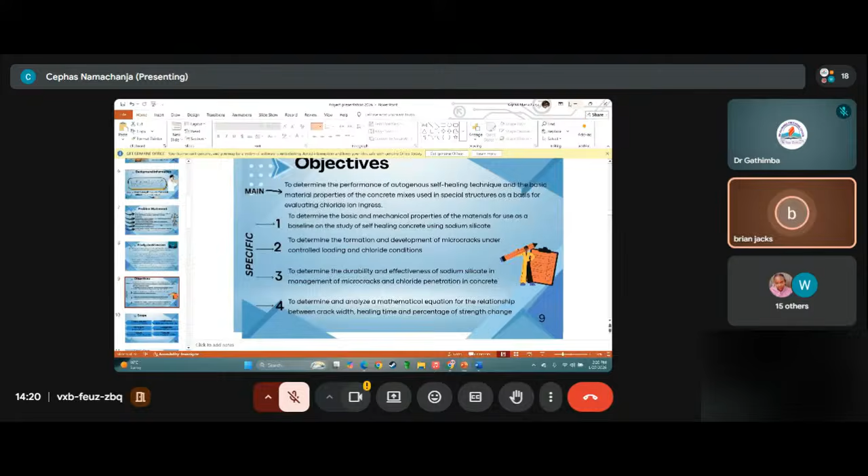Stop sharing. So good afternoon, my name is Margaret, and my colleague here is Khekame Wangusi. This presentation is on the performance of eggshell powder as a partial replacement of lime in the stabilization of red clay soil, under the supervision of Dr. Winfred Mutungi.

Second slide, background of study. Red clay soils are widely used as foundation and subgrade materials. However, they exhibit high plasticity and low shear strength, which leads to poor performance in construction. Lime is commonly used to improve these properties, but eggshell powder, which is rich in calcium, offers a suitable alternative that can supplement lime.

Problem statement: the problem addressed in this study is that lime-only stabilization can lead to excessive stiffness and brittleness in red clay soil. In addition, lime does not fully eliminate shrink-swell soil behavior and sometimes results in limited reduction in plasticity. This creates a need for an improved stabilization method.

Study justification: the research supports sustainable engineering practices and green construction initiatives. It also contributes to knowledge on alternative stabilizers for problematic clay soils. This study promotes environmental sustainability by recycling eggshell waste and reducing landfill disposal, and it lowers costs for construction since eggshells are locally available and inexpensive.

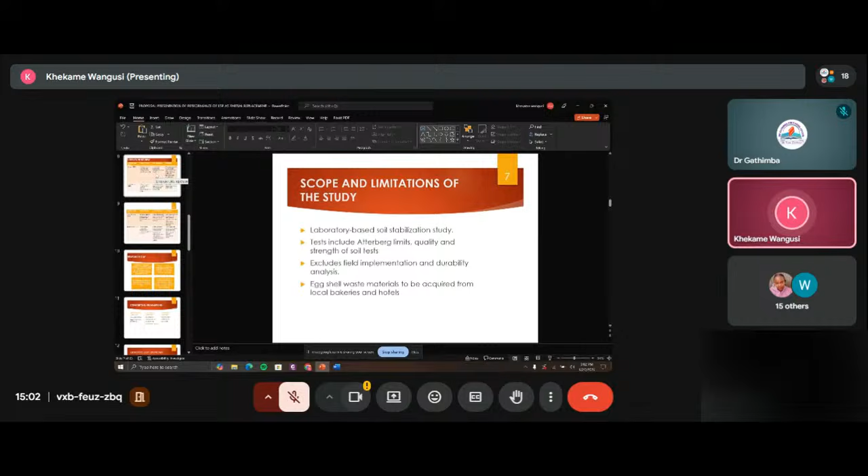Scope and limitation of the study: the study focuses on laboratory-based stabilization of red clay soil. Tests include Atterberg limits, the CBR test, and the UCS test. Field implementation and long-term durability studies are not covered in this research.

Our literature review: several studies have shown that waste materials containing calcium can improve the engineering properties of clay soil. Just to mention a few, we have Hinga, whose study focus was stabilization of red clay soil using natural gravel and lime, finding improved subgrade strength for rural roads, but the challenge was lime was costly and there were significant carbon dioxide emissions.

Then you have Joel Kimarai, who used sorghum stalk ash as partial replacement of lime. There was reduced demand and improved subgrade properties, although lime was still depended on for this.

Then we have Hassan et al., whose study focused on use of waste materials in construction, including eggshells. He concluded that eggshell powder has significant potential as an eco-friendly additive due to its high calcium carbonate content, though he did not provide experimental data on mechanical performance, nor did he address optimum replacement ratios.

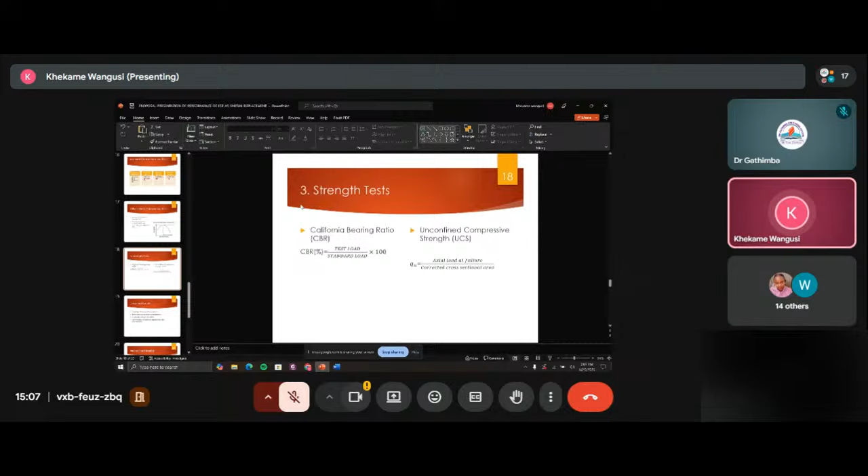The strength tests are carried out to determine the improvement in strength of the stabilized soil, which indicates the effectiveness of eggshell powder lime blends, using the various formulas given in the reference books.

Expected results include improved plasticity characteristics, enhanced compaction properties, increased strength, and identification of the optimum eggshell powder lime mix ratio. We have our project schedule, which will run from February up to June.

The budget of our project is given as below: eggshell collection 700, lime, collection of red clay soils, consumables, sample prepping including manual handling, technician support, curing materials, printing and binding, and contingency, which will all sum up to 10,000.

These are the references used in this study, including textbooks, journals, and standards that guide the research.

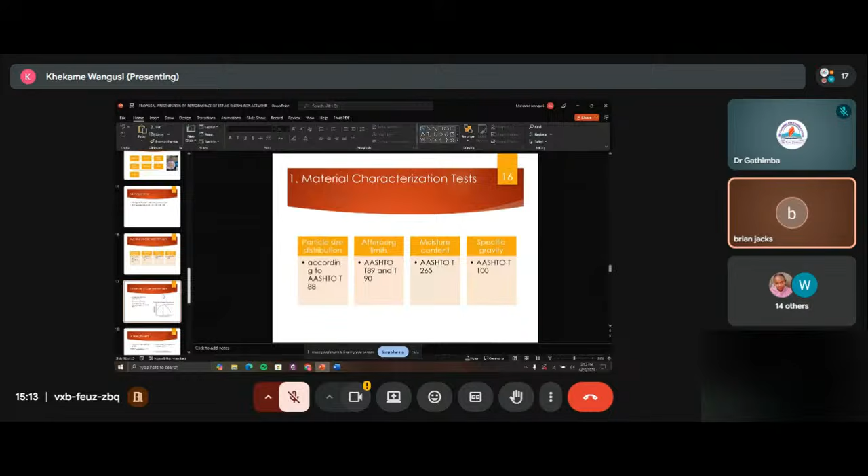Is it here? Yes, the next one, 17. Somewhere you're talking about eggshell, maybe it's there, where you wrote an equation demonstrating how you will do the work: eggshell plus 0%, 0% eggshell plus some 6%. Number 15, yes.

Tell me, what is the science here, in the first point or the second point? Both. For the first point, we use that as a control sample because it's something that has been done before. For the second point, we are trying to get the optimal proportion of eggshell powder and lime and the clay soil.

You know, eggshell is more of it calcium, and lime is of course calcium. Now, are these not the same thing? Same chemical content? They have the same chemical components, content.

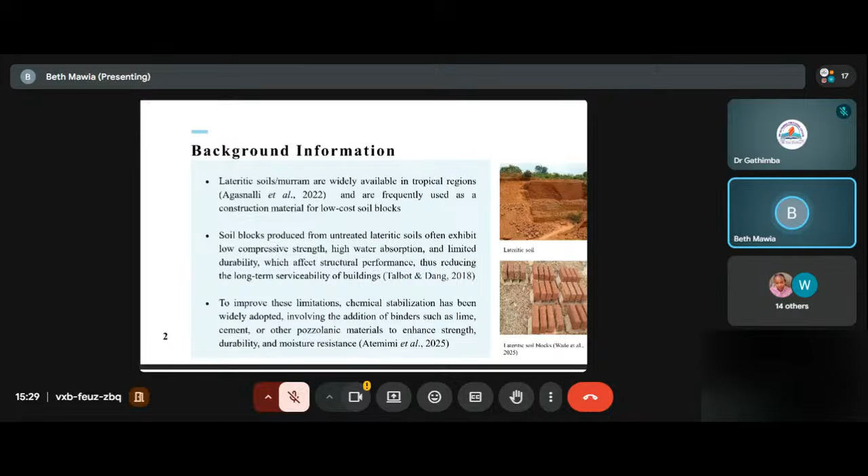Microsilica, which supplies high silica fume, is also used to supply additional silica, and when it reacts with lime, it forms cementitious calcium silicate hydrate, through pozzolanic reactions.

But these pozzolanic reactions are usually affected by factors like pozzolan composition, lime content, particle size, curing time, and temperature. Our research aims to investigate whether combining lime and microsilica can improve the properties of lateritic soils, and also if the mixing temperature has an effect on early strength development and the overall strength of the lateritic soil blocks.

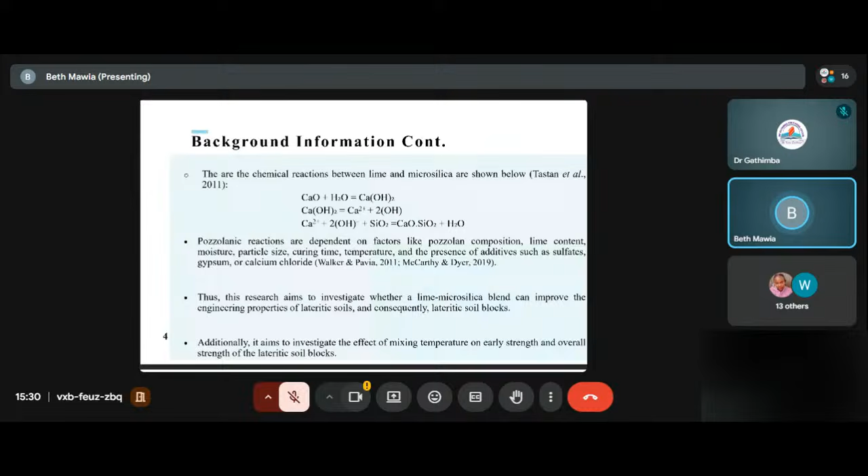Onto the problem statement. As observed in the background, unstabilized lateritic soil blocks normally exhibit characteristics such as high water absorption, low strength, and poor durability, which might cause structural failures, making it a risk. As we will be stabilizing the lateritic soils with lime, which causes slow early age performance that limits the reliability of the blocks in construction, we will supplement it with another pozzolanic material. In this case, microsilica has been proposed.

Objectives: the main one being to evaluate the performance of these lateritic soil blocks once they have been modified with lime and microsilica. On to the specific objectives.

Our first objective will be to characterize the physical and chemical properties of the lime and microsilica. Then we will determine the basic and physical properties, and examine the effects once we have mixed the lime and microsilica, which will definitely modify its properties.

The third will be to investigate the influence of mixing temperature on the strength and performance of the modified soil blocks. Finally, we will assess the durability of the lateritic soil blocks that have been modified with lime and microsilica.

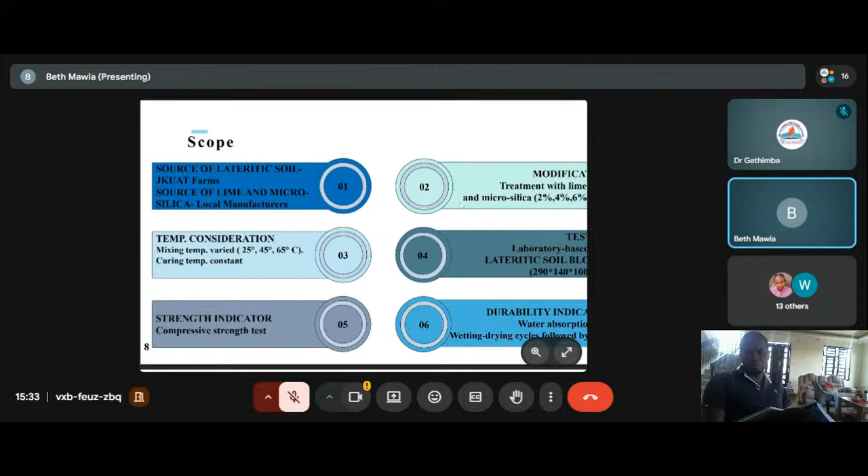I'm sorry, kindly please allow us. I don't know if you can see the entirety of our slides because from our end they've been cut out. Yeah, we can see, it's cut off. Should we change format or just go on? Just go on and finish.

Modification will involve treating with 6% lime, and the microsilica percentages will be 2%, 4%, 6%, and 8%. For temperature considerations, our mixing temperatures will be varied: 25 degrees, 45 degrees, and 65 degrees Celsius, but our curing temperature will remain constant. Our tests are laboratory based, and the lateritic soil blocks we'll use are 290 by 140 by 100 millimeters.

For our strength indicator, we'll use the compressive strength test, and for our durability indicator, we'll use water absorption and the wetting and drying cycles, followed by UCS.

Literature review: we reviewed some scholarly works. For example, there's this study by James and Rajasekaran on lime and fly ash. They found that lime and fly ash can be used to stabilize blocks, and they met the Indian standards.

But in our critique, we found that although they show how effective the pozzolanic materials are, they did not study anything to do with temperature variation. We also have another study by Lee et al.

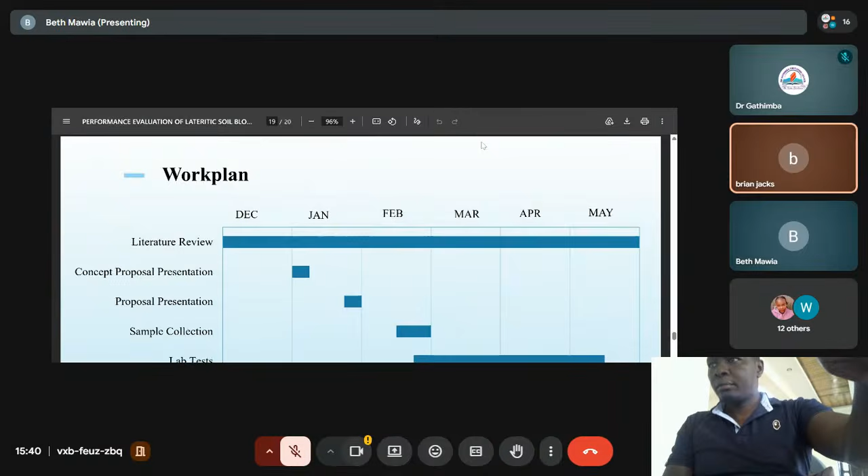What were the comments last time? The comments we had were to check on our title so that we align it with our general objective. Our general objective initially was bringing out strongly the catalyst, which is the variation in mixing temperatures, but we were told to align it as a specific objective, so we were supposed to check that in accordance with our title.

We also had another comment for objective 1 and objective 2: we were told to make objective 1 about characterizing the physical and chemical properties of the materials we'll be using, lime and microsilica, and to combine our previous objective 1 with objective 2, which became determining the basic properties of the lateritic soils, and the lateritic soils after they have been modified.

We also had a comment on how we would ensure our mixing temperature remains constant. For example, if it's at 65 degrees Celsius, how would we ensure it remains at 65 degrees Celsius? We chose to have that as a limitation. Yes, we had those three comments.

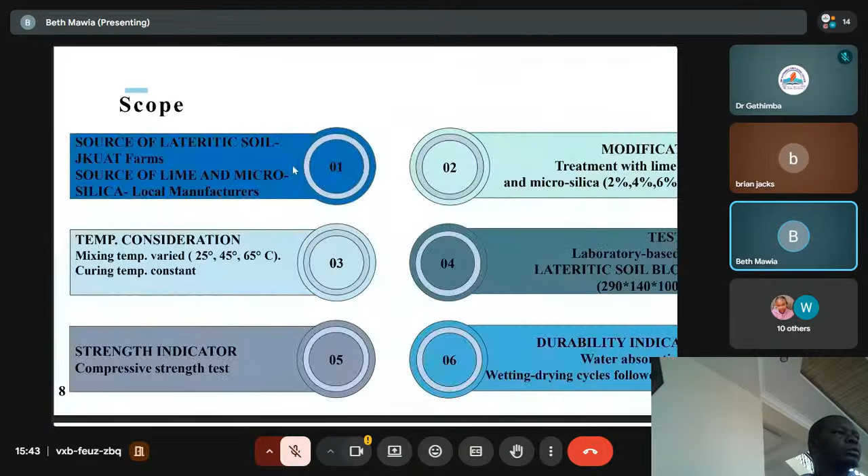Okay, thank you. Research gap, sorry, number 12. Research gap, number 12. Oh, anyway, thank you, I think that is it from my end.

Dr. Gathimba: maybe nothing much to add. Just a small part that I think you can improve on your work.

The problem statement. I just want to ask you a theoretical question about the problem statement. The second box, you are saying lime causes slow early age performance. Why?

From some of the studies we have gone through, we understand that even after the 28-day period for curing, blocks manufactured from lime still gain strength beyond 28 days. But in the initial days, it's just...

No, I'm not asking for empirical literature, I'm asking from theory. I believe I'm the one who taught you civil engineering materials 1. Yes, you did. We talked of pozzolanic materials, and we had a definition of what is a pozzolan, and the pozzolanic reaction, as opposed to ordinary Portland cement.

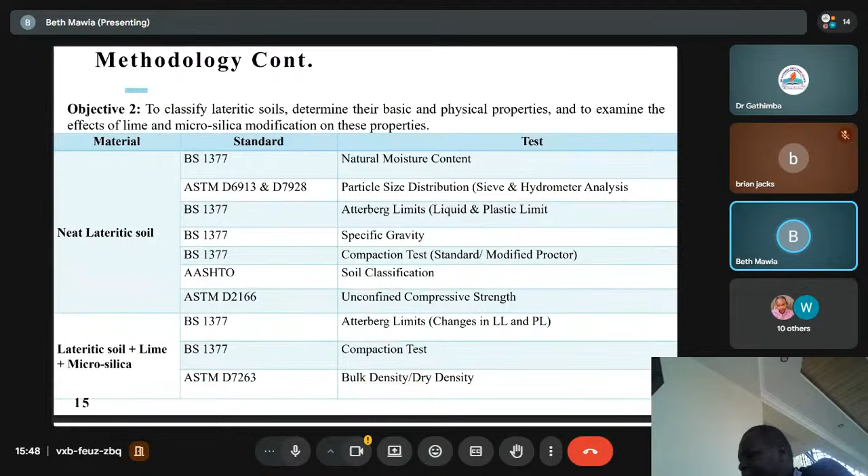So okay, then what was the other thing? Objective - okay, you apologized, I wanted to say your objectives are not complete, but you said it's an issue with the presentation. Can we please change to our PowerPoint itself, because this one was the PDF, so that it's visible. No, it's okay, it's okay. Now you already said it's a challenge, so I can see it now in the methodology. I think it's okay, it's okay.

But if you can find out what was the challenge - I believe the way you are presenting now is good, because it gives us a big screen, as opposed to when other people are presenting and we have to see all the slide tabs on the left hand side. This one gives us a chance to see just the slide you are presenting, it makes it more legible. One way of doing this is to convert your work into PDF, but I don't know why people don't like converting to PDF.

Anyway, the rest have been raised, so I don't want to repeat. Back to you, Chair. Thank you. Thank you, thank you, Dr. Winnie, I know you are the supervisor, but maybe you may have one or two comments or questions.

Thank you, thank you to the students for the presentation, and also thank you to the panelists for the comments. I hope we'll work on them, students - let's work on them. Yes.